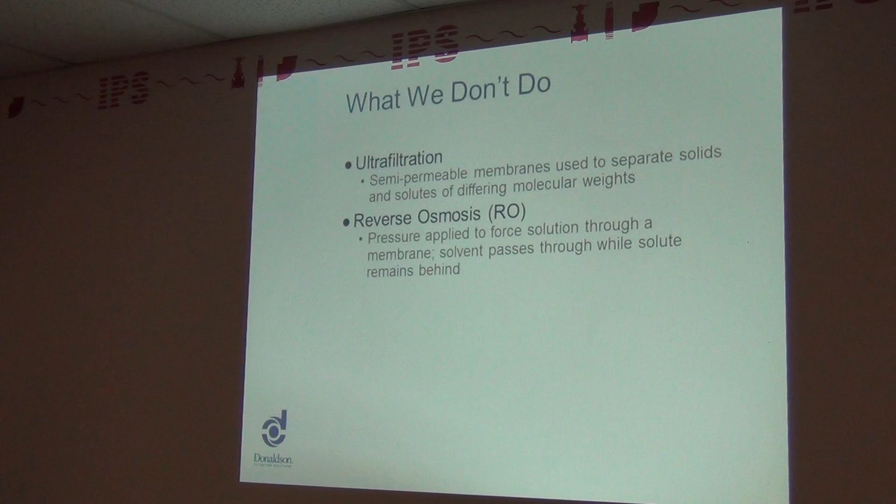Why do we filter? It's very important. The pizza that you just ate, the raw products before they went to Domino's, filtration was involved. The soda pop—I say pop because I'm originally from Pittsburgh, go Steelers—benefited from filters.

So filters are used anytime you walk through a supermarket. Look on either side of the aisle, and I guarantee you that filtration was used in the manufacturing or the packaging of that consumer good. So that's why we filter: to remove liquids, aerosols, and vapors, to prevent contamination or spoilage of product. It has to deal with shelf life of a food product, even if it's canned.

Avoid freezing in compressed air systems, especially with the winter we just had—you can get freezing in your compressed air pipes, which can shut a place down. Protect against contaminants that may break free from lines, such as rust. A black iron pipe at Harley Davidson, their compressed air lines could have been in service for the past 30 years, and you get a lot of scale on the inside of that pipe. You get a good hydraulic shock of compressed air moving downstream, and it breaks that crap loose, and it ends up in the tool, the air gun, or the PLC controller. And it can cause problems—not catastrophic problems, but those nagging problems which a maintenance manager doesn't want to deal with.

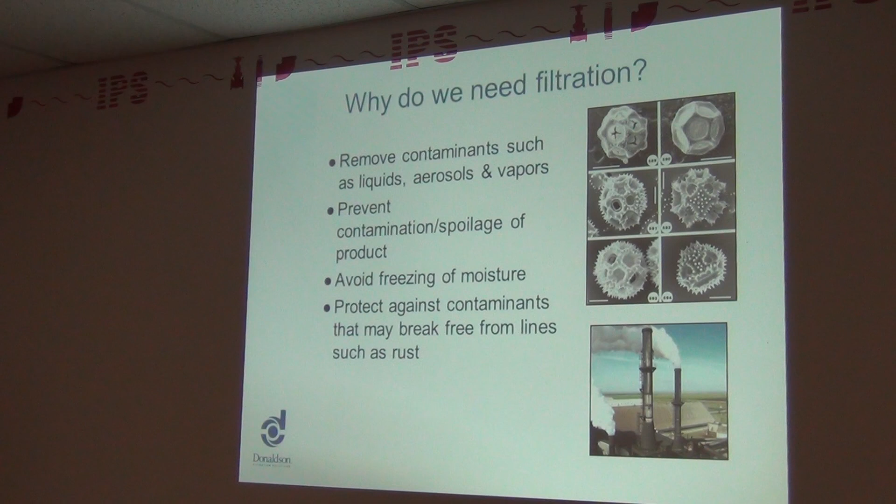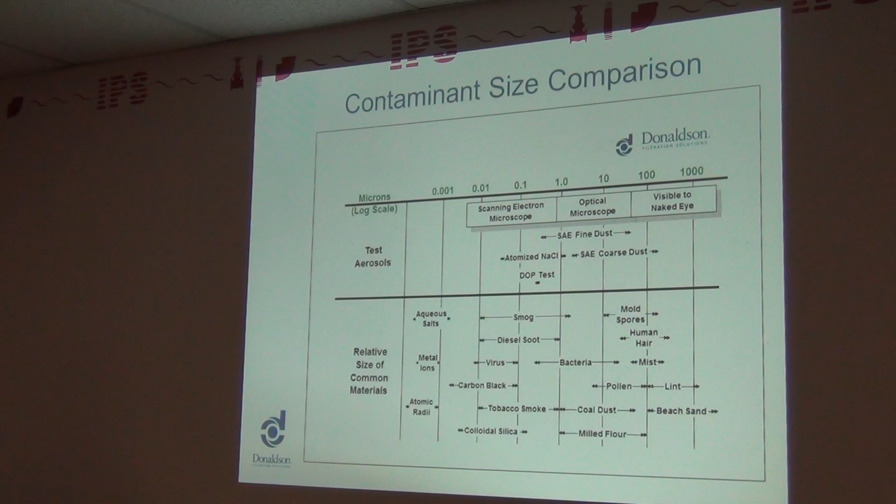So the particulate that I'm typically filtering is actually below what, if you still have 20/20 vision, God bless you, but I don't, is below what the naked eye can see. So 40 microns, roughly right here. And then you run down here: mold spores, human hair, mist, pollen, some coal dust, and some milled flour. I'm filtering everything smaller than that. At first I said, well, why is that important? As I got more involved in the industry, I discovered why, and I can go into that a little later. Just realize that the micron value, the size of the particle we're filtering out, is below what the naked eye, with 20/20 vision, can see.

Why do you think you'd be using, let's say I'll throw a value out, 600 psi? Where do you think that is used with this Sprite bottle? Any guesses, 600 psi, where it's used? In the manufacturing—well, I'd say in the packaging, not the manufacturing, but the packaging—of soda pop. Blow mold, yeah, that's what I was thinking. Blow mold. So Sprite and Coca-Cola will actually do their own blow molding.

Why? Because if you ship a truckload of empty 2-liter plastic bottles to your facility, you pay an arm and a leg, because trucking doesn't necessarily charge by weight. They'd always like to, but they'll have a classification on this which will make your eyes bleed if you saw what it would cost. So Coca-Cola and Pepsi and Dr. Pepper will buy preforms. This bottle originally looked like this, and then it goes into a machine where it gets reheated, and then they bump it with 600 psi compressed air while it's inside the mold, so it looks like this.

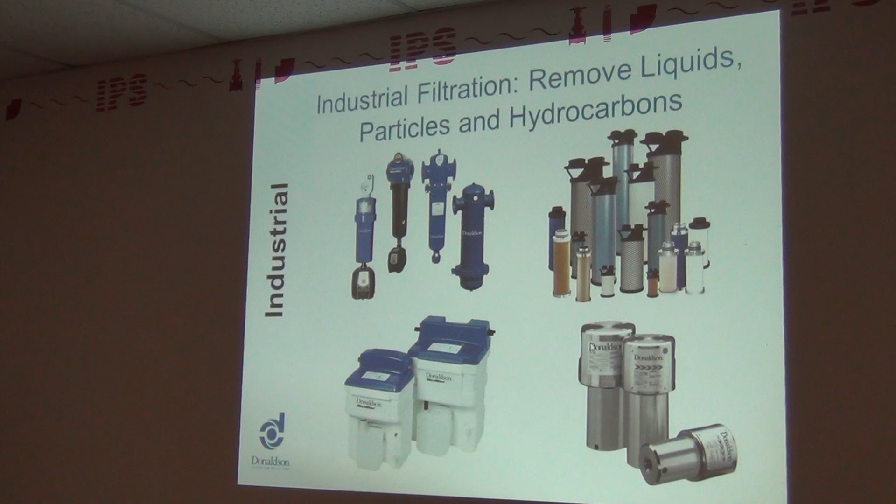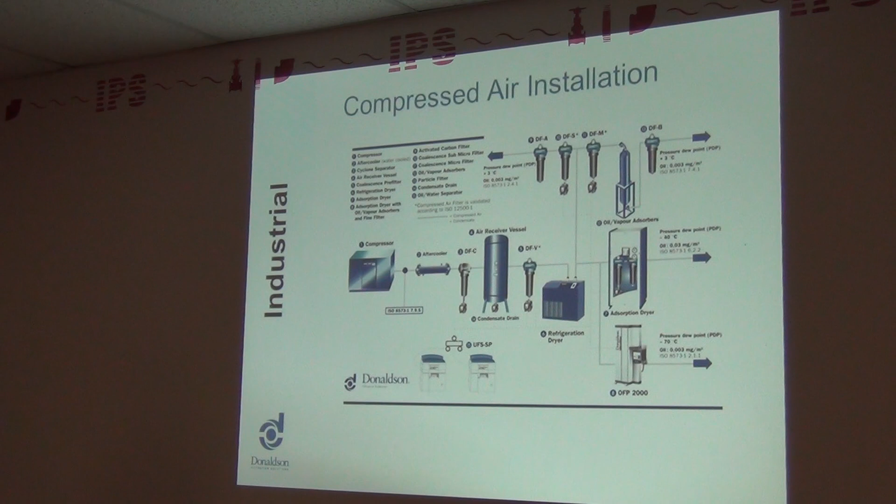Next time you open up your favorite hot dog roll bag, realize that bag was laying flat on the packaging machine, and there's no human opening it up and shoving the rolls in - it's all done by automation. They'll use a puff of compressed air to blow that bag open, and within a split second those rolls get shoved in. So just tell me what the end use application is. Even if you're working counter sales and somebody comes up scratching their head asking if you've got something for this, just write it down real quick and send me an email and I'll figure it out for you.

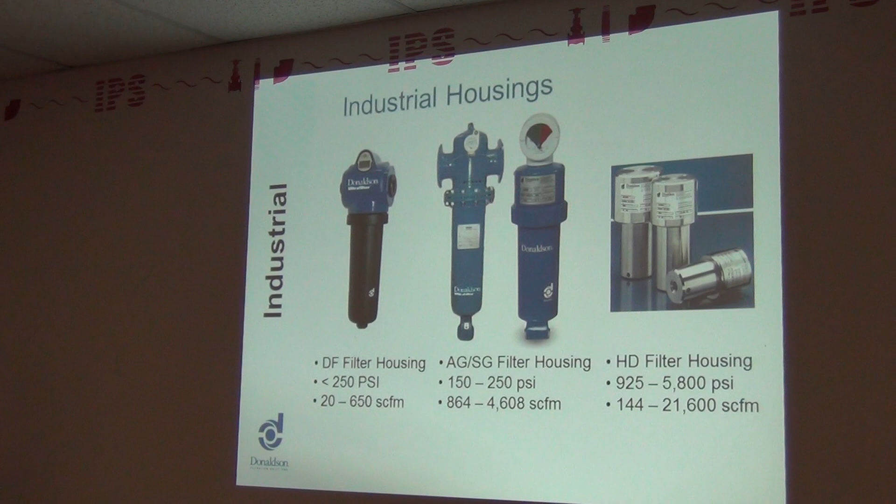And then again, our high pressure filter housings that you may find in a blow mold application.

Just a closer look at the filter elements. One thing I want to point out about this particular filter element is that it's a good money maker. Not only is it expensive, but it has a proprietary fit, so your competition can't come and say, well, I have this Napa filter, can you cross-reference it to a Wix filter? You can't do that with this. It's patented, and it's good for the next 9 years. So you sell this filter housing and filter combination, and you've captured that aftermarket business for the next 9 years.

Which is a good thing to have. Sometimes customers don't like it because they don't like being restricted like that, and as a distributor I understand that, but I try to guide people around that by talking about the features and the benefits.

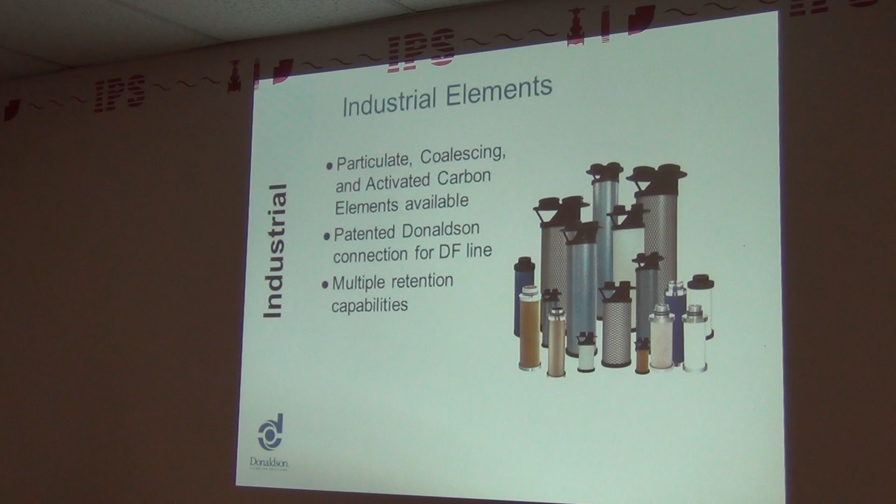So when I say dew point - if you have a compressor here and a production facility out here, that pipe, as it goes from compressor to production facility, passes outside or close to an outside wall. When it gets really cold in the winter, that ambient effect of the outside temperature could end up freezing that pipe. So if the compressed air isn't dried below that ambient condition, you're going to get ice on the inside of that pipe, and it shuts the place down.

Does anybody know what lost production time in manufacturing averages per hour in the United States when you have a forced outage? There's a big oopsie, something breaks, and you got to shut the line down. The average cost per hour in manufacturing in the United States is $20,000 an hour - that's what lost production time means. That's rather high.

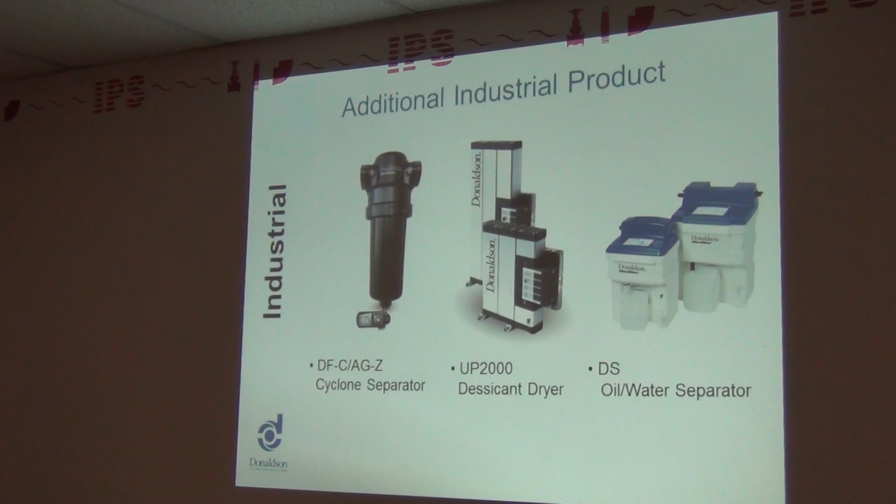So process filtration - we're going to move out of the compressed air world, and now we're going to get into process, and that could be either a gas or a liquid.

So, beverage. We all drink beverages, non-alcoholic and alcoholic. Filters are used in the production and manufacturing of that liquid every time. And here's an interesting story - we all drink apple juice, right? We all drink apple cider, right? They're basically the same product. What's the difference? Filtration. Filtration.

Would you buy apple juice that is cloudy? Think about it, would you? Probably not, no. But come October, will you buy apple cider that's cloudy? Yeah. The difference there is filtration.

That's just one example. Steam, applesauce, tomato sauce - how do you make that at home? You have a garden of tomatoes. How do you make fresh tomato sauce from the tomatoes you harvested? How do you do that? Boil them? Yeah, you use steam or hot water.

A large production facility like Furmano Foods in Milton, PA has basically a very large pressure cooker, or Knouse Foods for making applesauce - a pressure cooker the size of this room. It looks like a torpedo. They pump incredible amounts of steam directly into the mixture of chopped up tomatoes or chopped up apples.

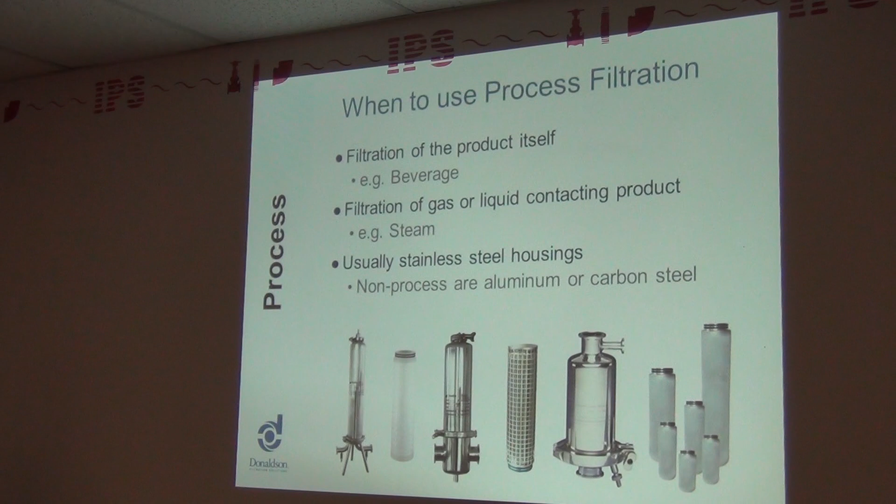So processed market - as I already commented, we have non-alcoholic beverages, bottled water, such as Nestle's or Turkey Hill.

Now, some of these craft beer manufacturers don't have the capital money to make that happen. But InBev, which owns Budweiser, just purchased 2 large craft beer facilities, one on the East Coast and one on the West Coast, and they're not changing a thing. Matter of fact, a lot of people don't even know that Budweiser bought them. But what it changes for people like you and I who sell pipe-fitted components is now these craft beer guys have capital money in which to invest back into their company to help sustain growth.

Dairy, we're very big in dairy. Cheese, yogurt, and milk are the 2 major products. We provide the sterile air and nitrogen that is used in a lot of yogurt facilities. So next time you eat blueberry yogurt, think that probably Donaldson played a very important step in that.

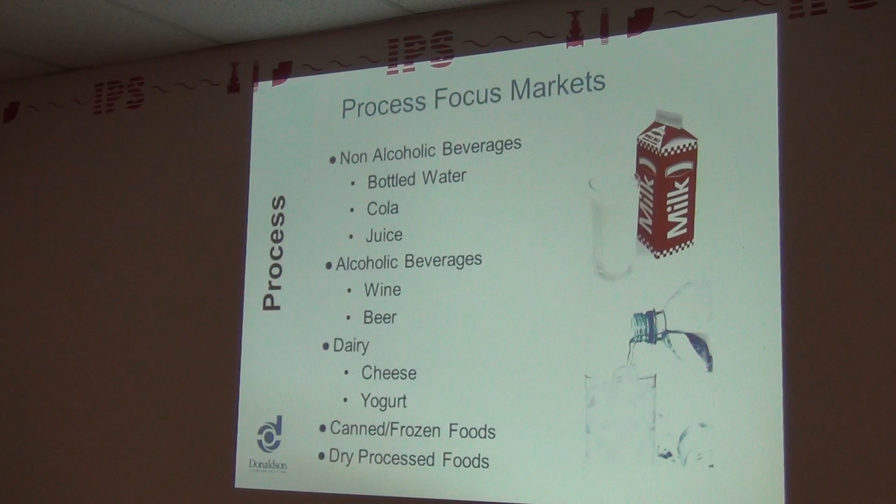Culinary steam, we have filter housings and stainless steel filter elements, sterile air. So we take compressed air and then we steam sterilize the inside of the filter housing and the filter element. We let it cool down and then we start pumping compressed air through it. That compressed air can be used to release a baked loaf of bread out of a pan.

Liquid filtration, all this is about 98% water. And it's filtered down to 0.45 micron before all the flavors are mixed together and then pumped into the bottle.

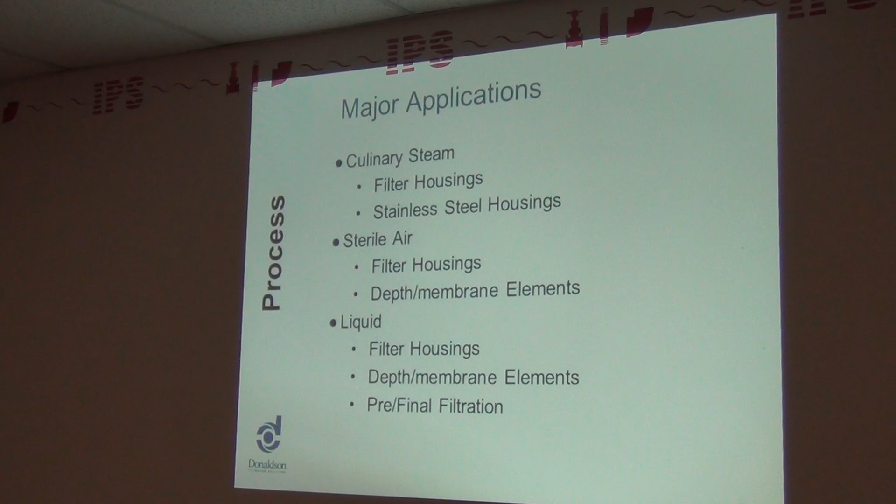This is sanitary inherently because of the triclover fitting and an RA 32 finish. But both of these, as they sit alone in the box, are not sterile. You need a sterilizing agent, and typically that'll be steam to kill bacteria. This won't remain sterile as long as this filter housing will.

And then this product over here, the PF-EG, is a filter housing much like this one, except this is intended for liquid, and I have an example of that. So what do you think list value on that filter housing sitting on the desk is? Anybody want to guess? 2,500? No, it's about $1,900. And your discounts can be as high as 35-40% on a buy resale agreement. So you can imagine walking into a facility that has 60 of those. That's just a lot of money in housings.

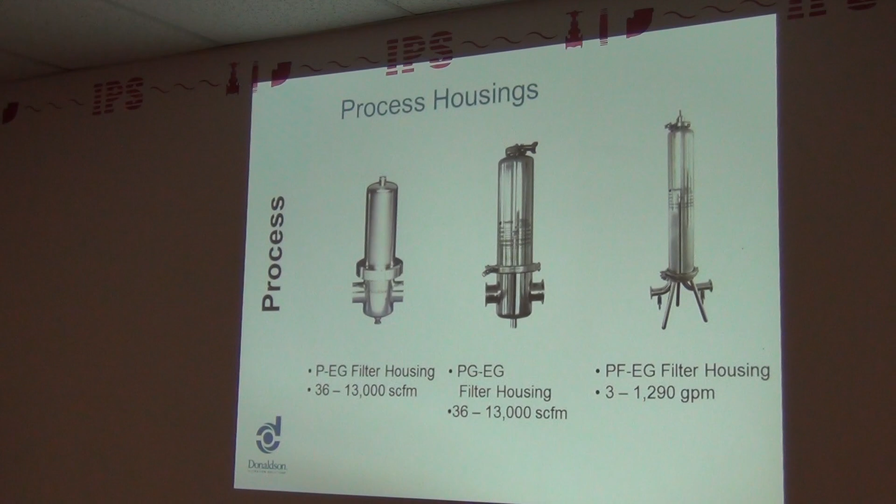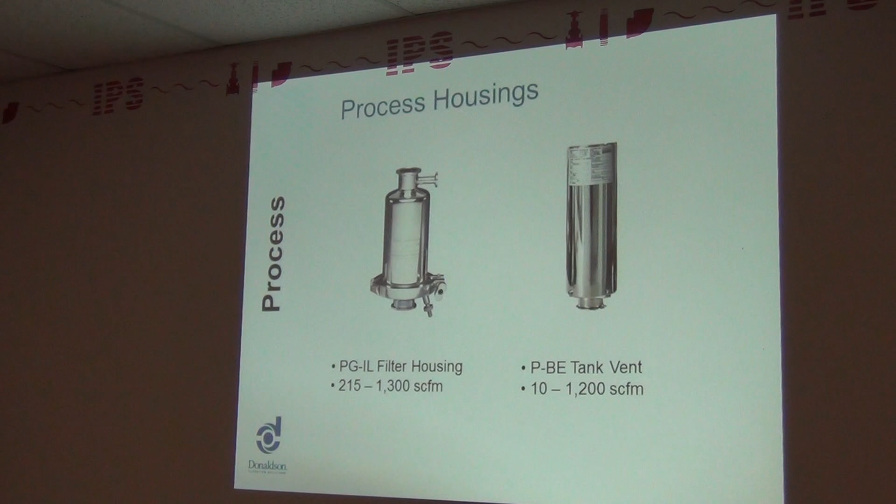These are some of the elements that get stuffed inside of these housings. This is for sterile air. This is all stainless, so that's obviously what we use for steam. And this is our water filters.

So you get all the piping, you get all the valves, whether they're industrial NPT fitted valves or whether they're triclover fitted valves here, steam traps. You get all those components. I'm just asking for five filter housings.

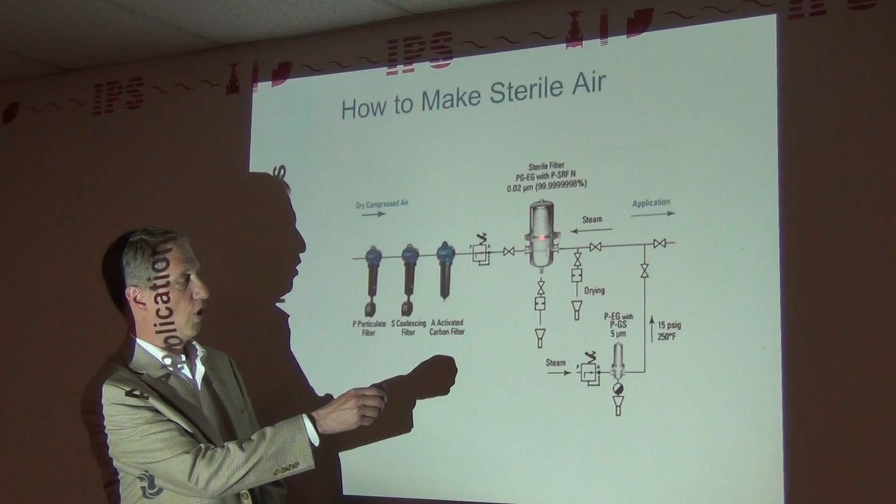Before we start pumping sterile air, we're going to bring in 15-pound steam, and we're going to cook the inside of that filter housing and the filter element for about an hour. Then we have to let it cool, and then we can use some compressed air to dry it.

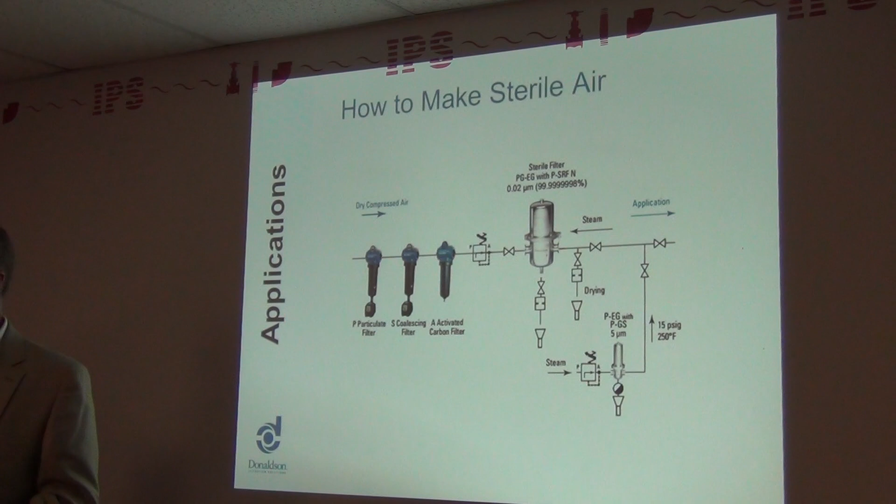So this valve will remain closed. This valve is open, and now we're just blowing down some compressed air to dry the filter element. After about 2 hours, now we're ready to start pumping sterile air into my packaging facility. And I'm packaging mayonnaise, I'm packaging Ocean Spray cranberry juice, goes on and on and on.

So this is a nice piping layout to see where all of your components impact a consumer good. And actually, we like this diagram so much that we even publish it on the back of one of our brochures.

This is an excellent sales tool to help your customers understand what you do. You sell every bit of this.

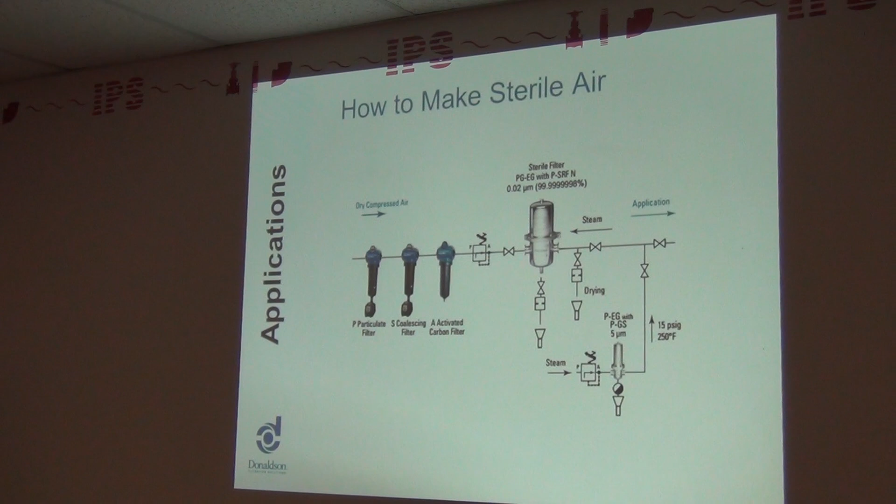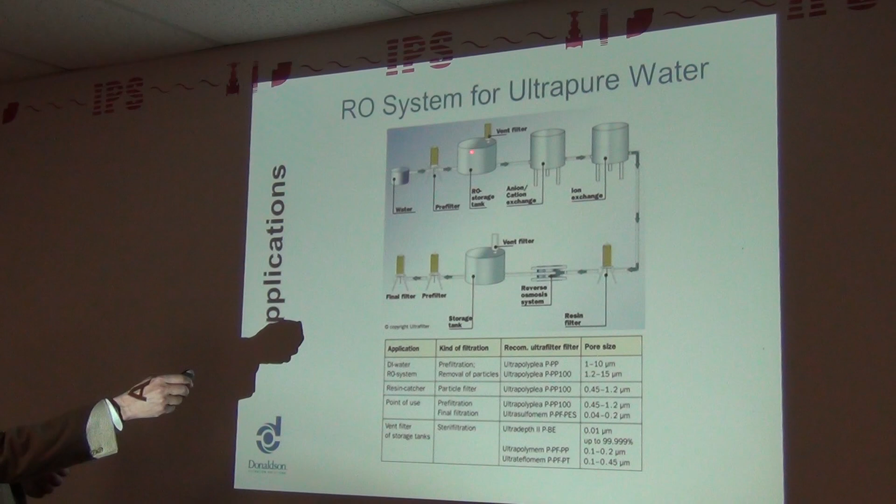RO systems, Dasani, which is a brand name for Coca-Cola bottled water. They'll take water out of the ground or from a municipal source, and they'll run it through a pre-filter into a storage tank. And then they'll use some really fancy sand or carbon to help remove sediment and other things that are dissolved, other compounds that are dissolved into the water.

And then we go into another, and there's other stages of filtration, various different micron values. Then we go into a storage tank, then we go through the RO system. Or actually, I'm going the reverse way. We go through the RO into the storage, and then it goes into packaging.

But with Dasani or Aquafina, they strip everything out of that water. And then they actually put salts back in so they can get that water to taste the way they want it to taste. So it's a very intensive process, and there's a lot of filters and a lot of tanks and a lot of pumps and a lot of pipe and a lot of valves.

And even if these production facilities are up and running, things break. Actuators on valves break. Valves leak. Unions leak. Triclover clamps break. So there's always that aftermarket business.

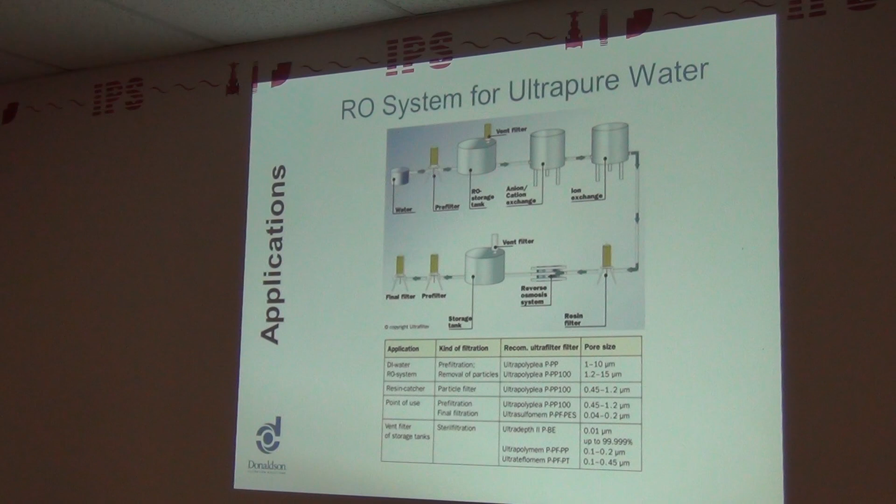And then you start thinking about the filter housings that are on site, which are in the gold here. There's aftermarket potential there to sell filter elements like this one or this one. Or if there's steam on site, you can sell that one too.

It all helps drive aftermarket sales, which is a key ingredient to a facility like this in its yearly sales goals.

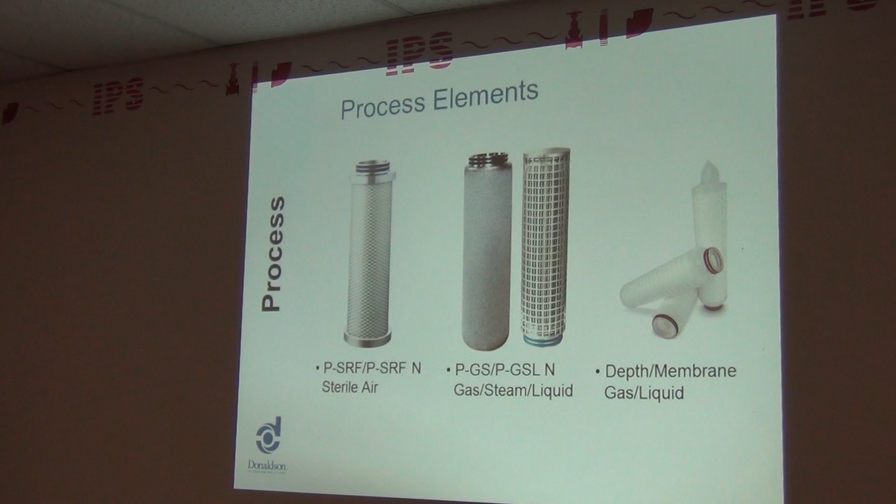Water purification, I don't think, I really just went over that. Sterile filling.

There's a term that we use, it's called co-pack. So you go and buy this barbecue sauce. Never heard of it before. It's like Uncle Ted's barbecue sauce. Well, Uncle Ted does not own a building to package his sauce. He goes and contracts that out.

And it's very important because he'll go to the co-pack facility, and there's several of them here in Lancaster and York County, and they help him make that shelf stable. Because he didn't think of that when he was thinking up his barbecue sauce that he won all these competitions with. How do I take this to market? Well, it has to become shelf stable. So he'll go to a co-pack facility, and they help address some of those issues.

And that's where you look at the list of ingredients and why you always find preservatives in some food. But you have to go from your large mixing tanks into a filling machine. And there's always compressed air and steam used there.

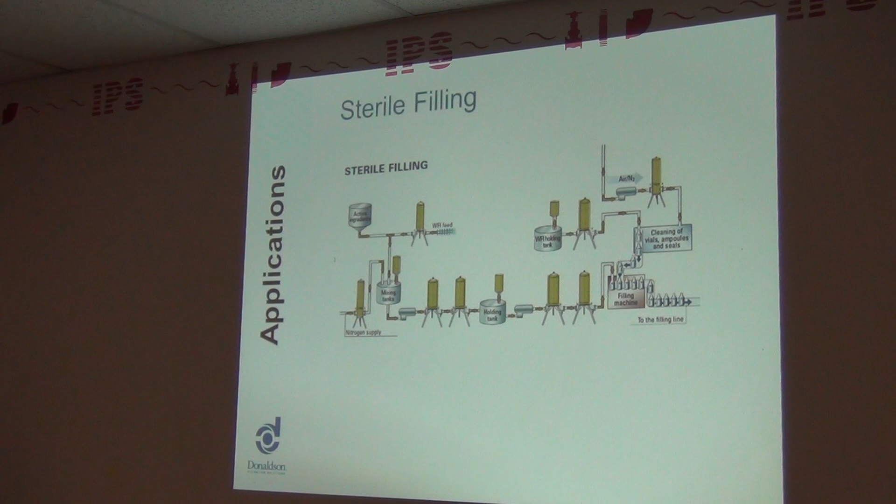If you have a swimming pool, especially an older style one, you probably have a diatomaceous earth pool filter, so you've probably seen what that white powdery stuff looks like.

So next time you're at a craft beer place, maybe up at Stouts in Adamstown, and you see the beer's cloudy, go ahead and drink it. It's actually going to taste a lot different than a beer that doesn't have that cloudy appearance.

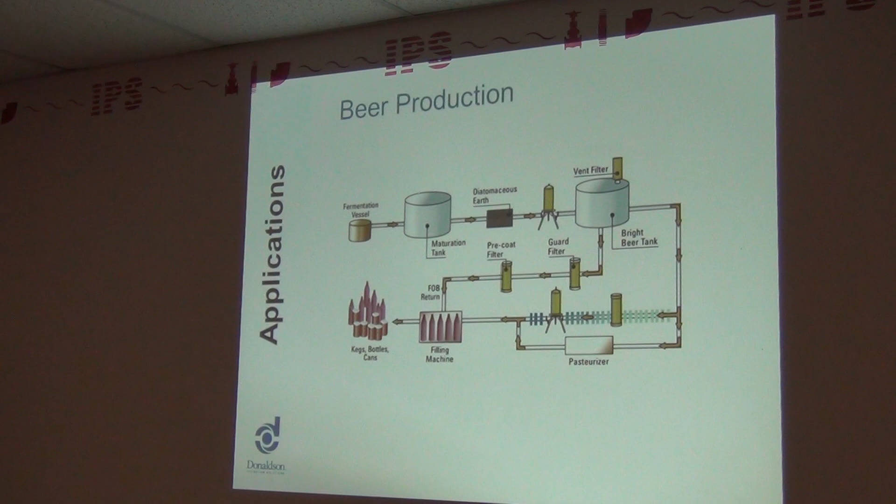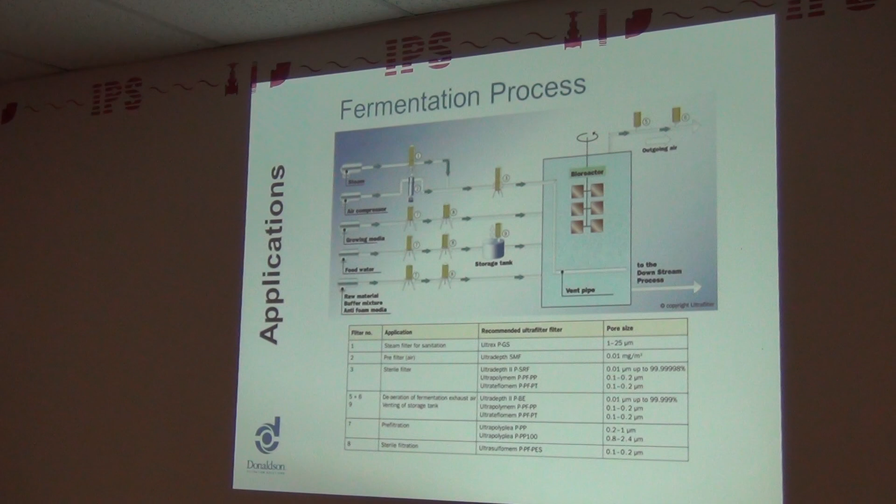Fermentation, making drugs, or making yogurt - you're dealing with a fermented product. This is a flow diagram showing where you can sell a lot of pumps, a lot of valves, a lot of pipe, and filters.

So we feel that we have a comprehensive product line that addresses the food and beverage industry fairly well.

Quality - you can touch and feel some of the components, and I believe in the quality of the product. We also have a knowledgeable sales team - I don't want to pat myself on the back, but I do have about 25 years of application experience. Aftermarket support, and then today what we're doing is just customer training.

So that was kind of the shotgun approach to our product. If you have any comments, questions, or anything in general, feel free to ask. Thank you for your time. Any questions, guys?

Was it too boring? No, it's interesting.

As someone in sales, I'm always trying to make sure that I don't put people to sleep, because I've sat where you've sat for 25 years and listened to talking heads like me, and it can be cumbersome just to get through it. So you did a very nice job. I try to relate it to consumer goods and real world stuff, so not just - I mean, I would love for you to go to bed at night and wake up in the morning thinking about Donaldson and filters, but you're probably thinking about other stuff, probably more important things, like IPS. Well, there are nights.